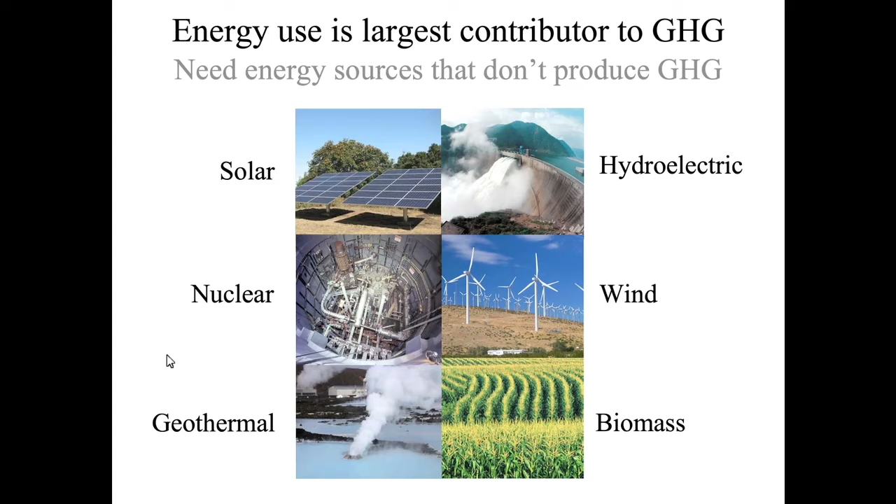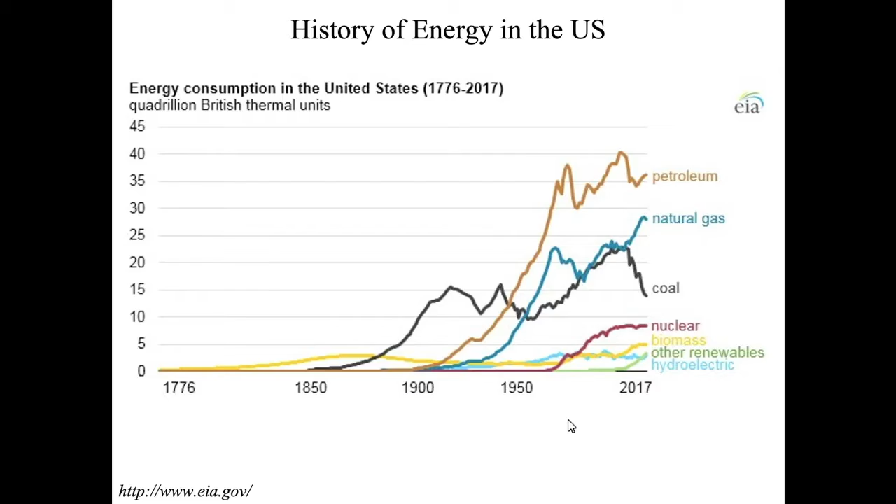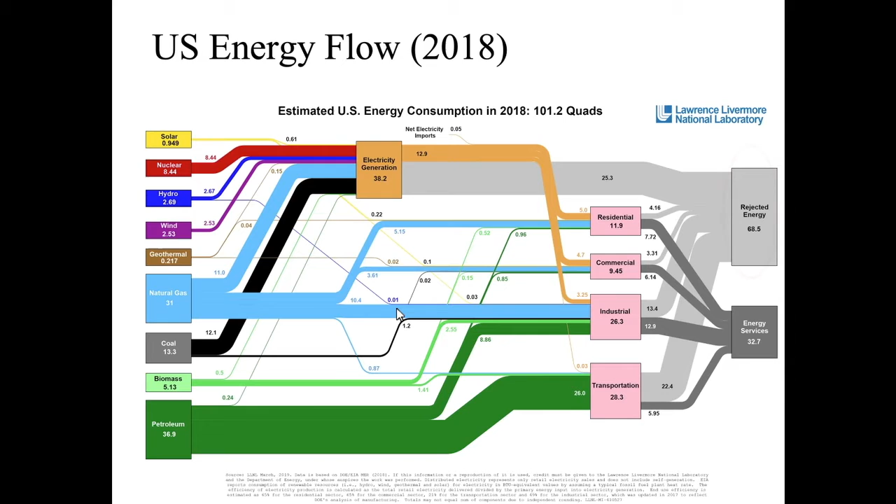The renewable energy sources, the non-greenhouse gas producing energy sources, are small contributors, but mostly they go into producing electricity. So that's how to read this Sankey diagram. And I want to bring your attention to the gray boxes at the very end. This totals up what happens to that energy in 2 categories.

One is rejected energy. What is rejected energy? It is wasted energy, energy that goes into the environment as heat without doing anything productive or producing any work. The actual energy used is described here in energy services, and that's less than a third of the total energy that we consume. So we consume all of this energy and use only a third of it.

That's like filling your gas tank up with 15 gallons of gas and pouring 10 of it onto the road. It's a huge waste and a huge opportunity to improve our energy situation through efficiencies.

This wasted energy is largely a result of the inefficiencies of burning fossil fuels. It's a very inherently inefficient process. A lot of the energy just produces low quality heat that can't be used for useful work. And so we can realize real benefits from improving efficiency.

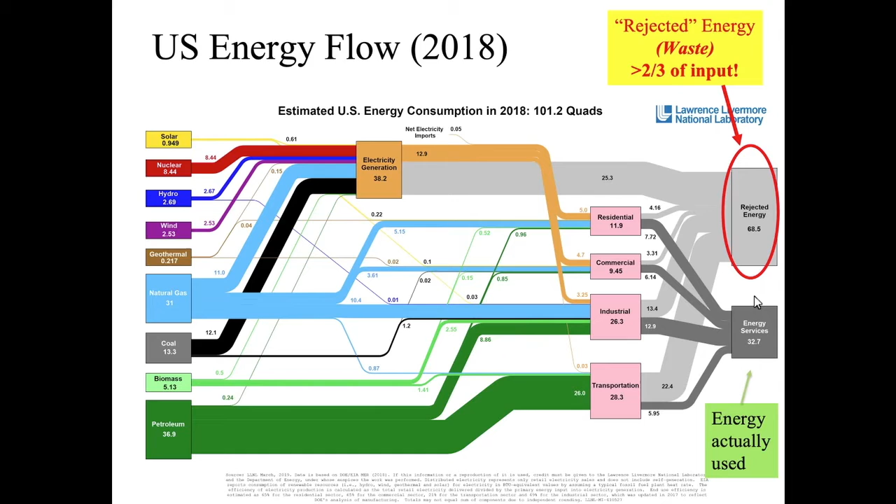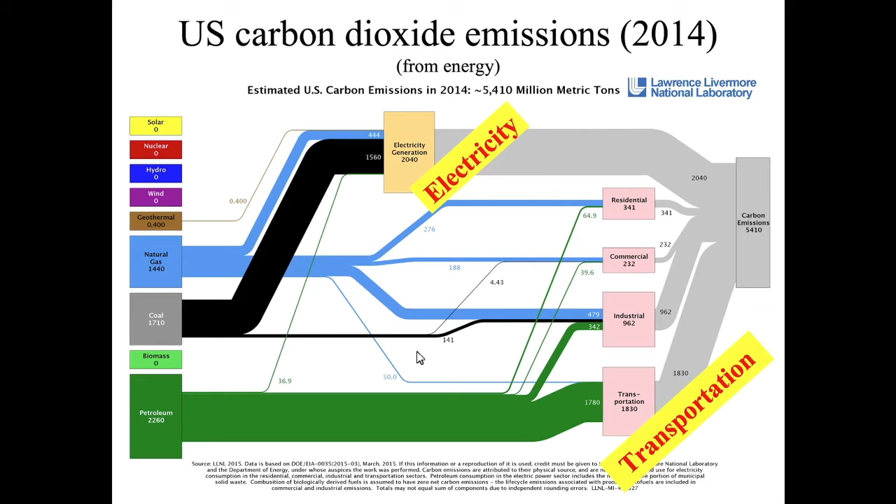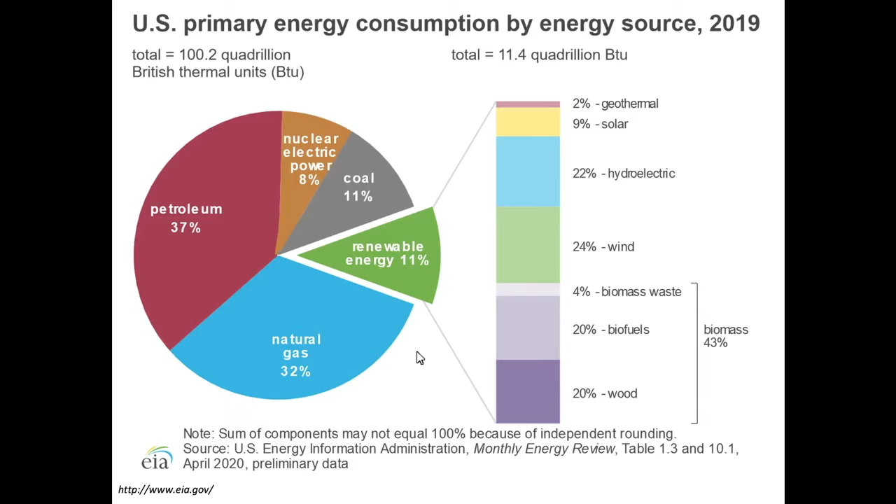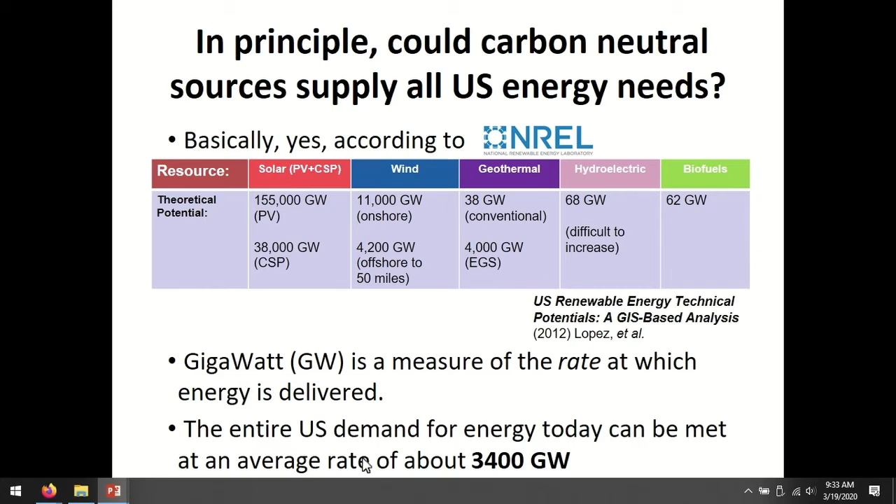Okay, so now let's take a little closer look at some of those potential sources, and explain why I think some of those are more important than others. And we'll start from the right of that previous table. Let me even go back here and see if this works. So we'll start with biofuels, sometimes called biomass. We'll look at hydroelectric and various kinds of geothermal as we work our way toward these other familiar sources that have a lot of potential.

We think we should continue using biofuels and biomass where that's practical and economical, and it's good, especially appropriate for heating in many contexts, modest amounts of heating. We use also biomass right now to supplement our gasoline fuels with liquid ethanol that's derived mostly from corn crops. That I don't think we want to expand a lot because, for one thing, we need corn for other reasons, and for another, the energy that you put into planting, fertilizing, tending crops, harvesting, processing the ethanol, that takes a lot of energy as well. So it's not really much of a net source of energy. So not a great benefit for the balance of impacting the climate. So we're not going to project much, if any, maybe even a decrease in the use of biomass overall.

For hydroelectric, it's somewhat similar story. Hydroelectric power is a great source of clean energy. It can be harvested pretty continuously at a given rate for a given stream, of course, but you can get that energy and deliver it without any greenhouse gases being emitted. So that's what's really good about it. But we have developed, in this country, hydroelectric power almost to the maximum we probably want to. I don't think we want to build a lot more dams and reservoirs to increase this source. We're already on the optimal sites. There's a lot of good reasons to keep rivers in their current state if they're not dammed up.

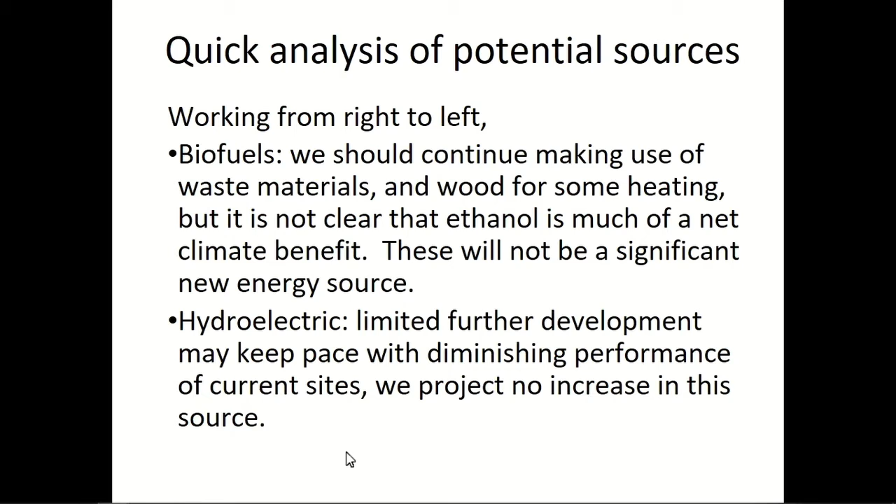You may have heard about the Kalamazoo River where dams are being removed. Wildlife, recreation, habitat. Habitat is changed a lot when you make a big reservoir. There are other competing land uses. There aren't that many good places where you could add more dams, maybe a few more in Alaska. But for these reasons and others, we don't think this source will be expanded a lot.

The story with geothermal can be kind of confusing. Traditional geothermal power is harvested from the earth because deep down the earth is hotter, and anytime you have a temperature difference, you can exploit that to use that energy to make it turn it into mechanical energy, and for instance turn an electric generator and make electric power. And this has been demonstrated. It's done in certain sites. The places where it's economical and good to do are kind of unusual sites where the way the Earth's crust and fissures and faults are, hot parts of the Earth, hotter temperatures are located closer to the surface.

If you've been out to Yellowstone National Park, that's one of these places, and weird things happen. And so these are the places where you can exploit this resource very well. But there aren't that many of them around, it turns out, that are really, really good. To expand this type of energy, you'd have to drill deeper and use more technology and more complicated things, and it would be more expensive, and it's not clear that's a really good way to go.

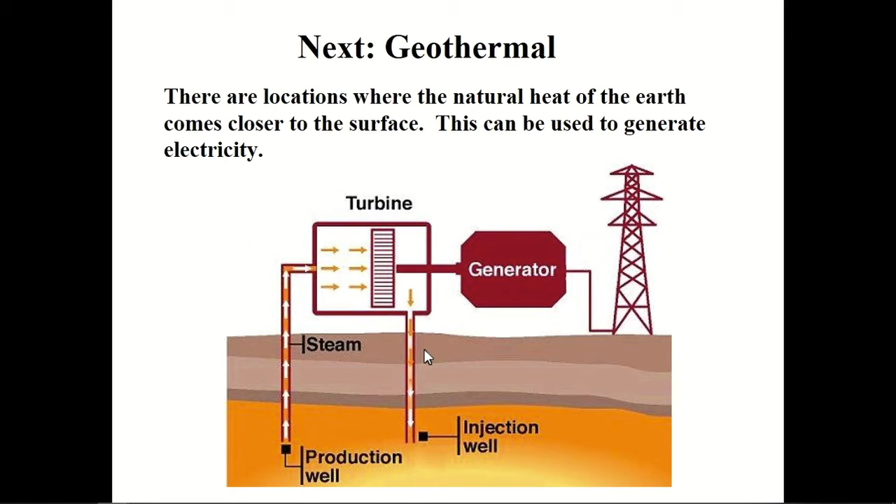So you get less energy than you thought for your investment in drilling the well and putting up the equipment. If you wanted to go someplace else, you'd have to spend more money. So there's not, in our judgment, a lot of potential for expansion there that makes sense.

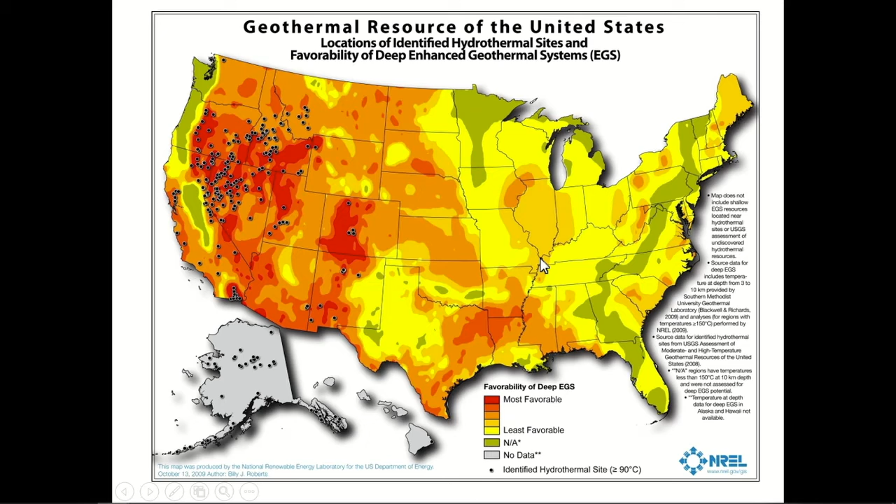This slide shows a few of the favorable sites and where they're located. But there's a lot of places where it's not favorable, and the good sites are actually fairly rare. So this slide again talks about that—I got a little bit ahead of myself on the audio part. Without going into much more detail, most people agree this is not a big future resource to expand and cover a lot more of our needs.

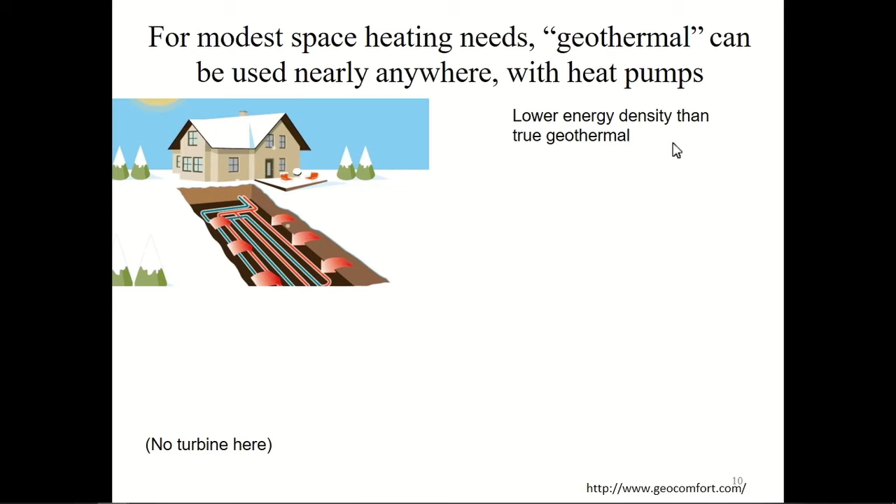There's another kind of geothermal power some people are more familiar with, that is not as expensive, not as elaborate, and doesn't require this deep drill. It just exploits the fact that below ground, anywhere you are, you don't have to go too far down before the temperature stabilizes and is year-round at about 60-some degrees Fahrenheit.

And it means in the winter, you can bury some pipes, circulate some fluid like antifreeze, and extract that heat energy. It's much lower density heat energy, but it can still be extracted using a heat pump, just like what's used in a refrigerator. You can warm up some air or water for use in your home or reasonably sized buildings, and that works pretty well.

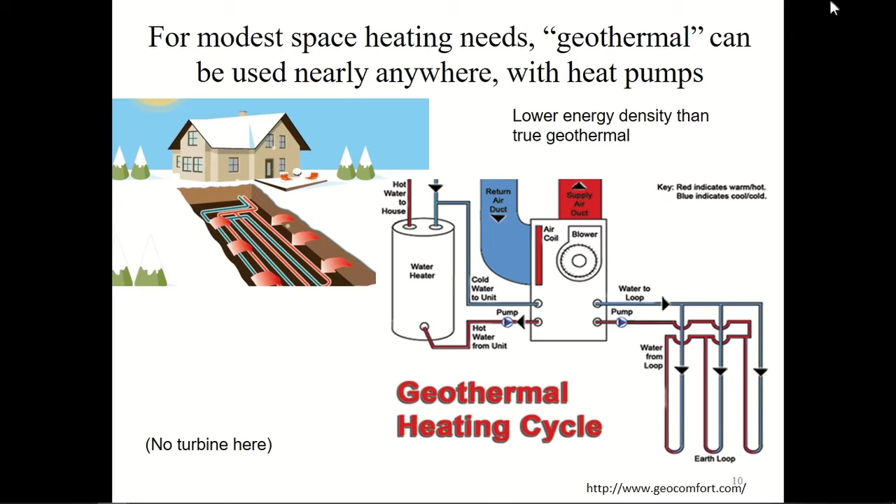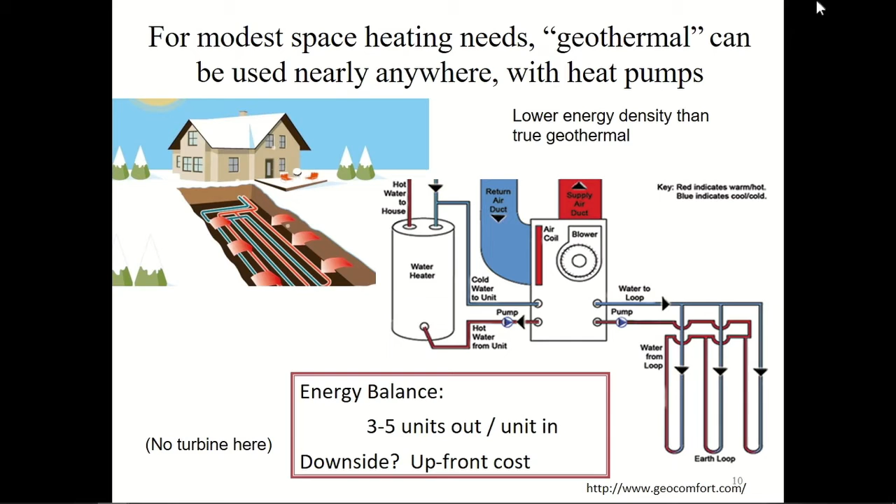And it's another fairly carbon-neutral way of supplying some energy for heat. There's nothing wrong with it. But again, it's probably not going to be a huge source of energy on a large utility scale, like for industry and transportation and all the other things we use energy for. But it can make a contribution for home heating and space heating at a modest scale.

In fact, we are doing it here at Western Michigan University with our new Alumni Center and the Zhang Legacy Center, where the archives are on our East Campus. It can be a reasonably good way to go if done well. It's fairly expensive relative to other forms of space heating today, so that's another reason we don't think it's going to be easy to expand a lot, but it will have a place.

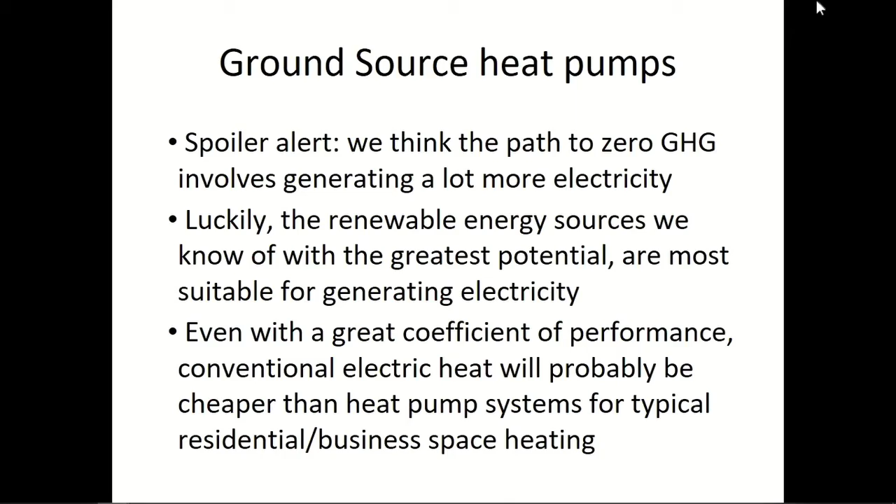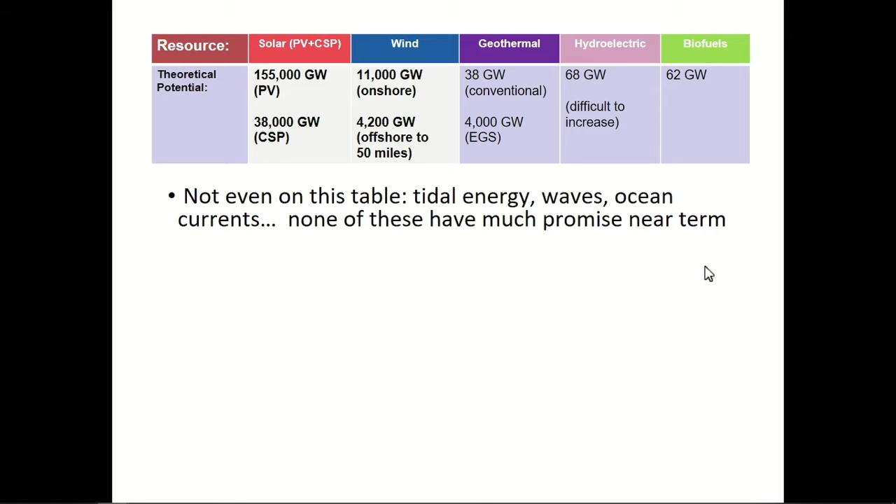So on the large scale, when you're talking about the thousands of gigawatts or the 100 quadrillion BTUs of energy we use per year, we need to be talking about the things further on the left on our previous table—the solar power and wind power, which can be exploited at a larger scale, again with little climate impact. So those are the things I'm going to count on and recommend that are in the mix in 2050, including nuclear fission.

Yeah, that's the kind of nuclear power we have nowadays already. Nuclear generating plants are already generating electricity, supplying the grid all over the country. About 100 nuclear power plants in this country right now, many in other countries as well.

While some people have issues with nuclear power, the threat of climate change on a global scale means we really have to take seriously the possibility of continuing to use nuclear power, even using more nuclear power in the future, unless we really want to change our way of life or decrease the amount of energy we use significantly.

So that's because, despite issues with radioactive waste at the end of a fuel cycle, the greenhouse gas emissions traced to nuclear power are very small compared to fossil fuels, which are the other big way we generate electricity today. So we're going to keep that in the mix as we go ahead.

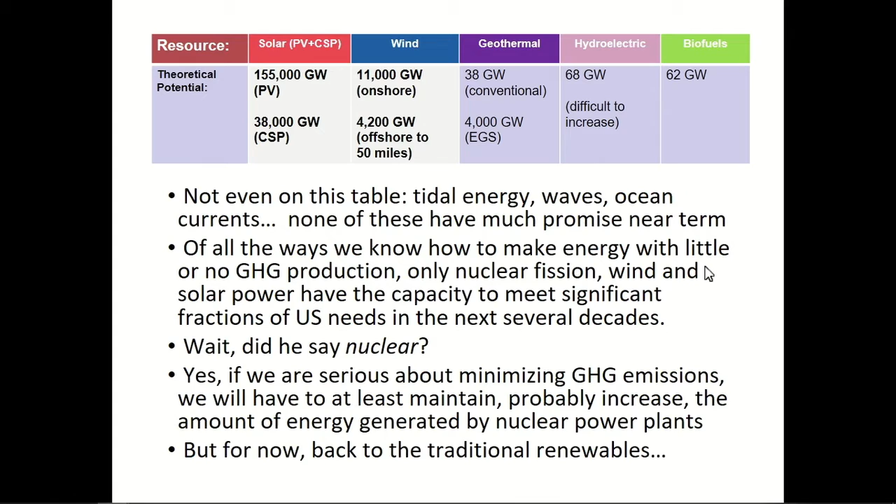And we might be able to talk in another session about newer and safer technologies for exploiting that resource. But for now, let's go back to our traditional, more familiar renewable energy sources that can help us on a large scale. And those are solar power in the form of photovoltaics.

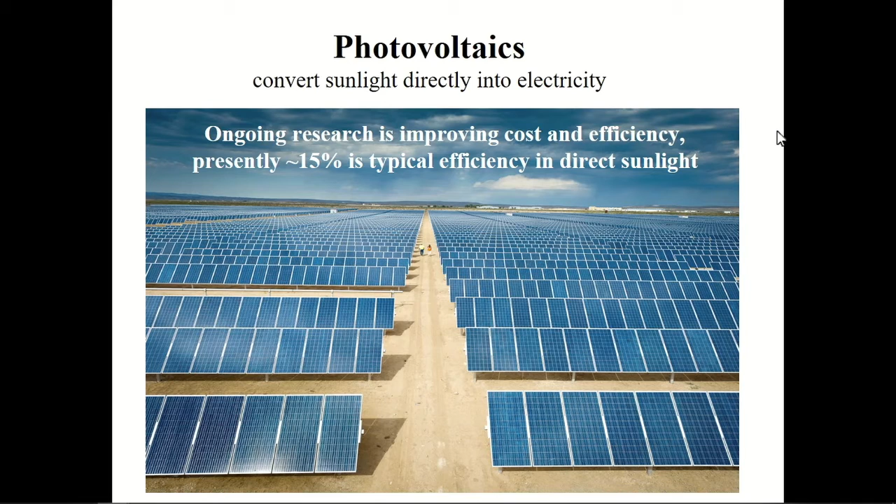Those are the panels, the dark-colored panels that just by sitting in the sunlight turn solar energy directly into electrical energy. That's one way to make solar power. It's a very nice way, very flexible. These are solid state panels. They continue to be improved and get cheaper to manufacture every year, so they're already very economical in a lot of situations.

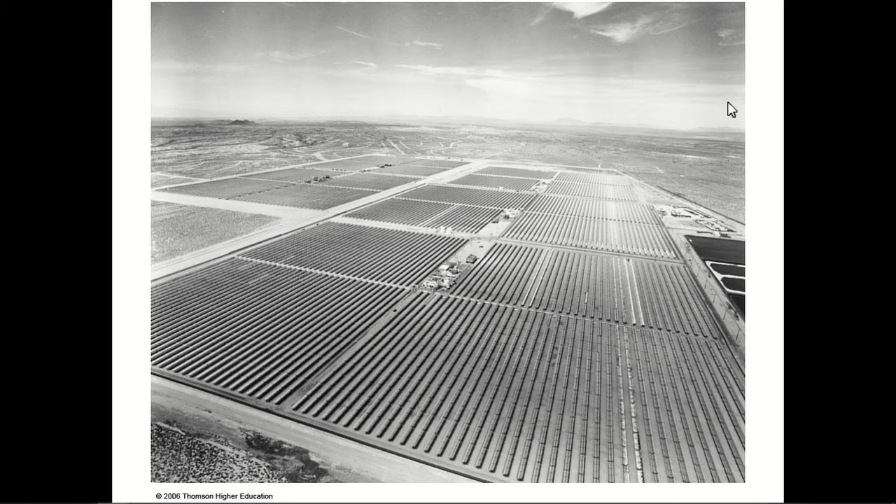These kinds of plants are always at the utility scale—they have to be, since they wouldn't be very practical on a small scale. You have big fields like this that, instead of being solar panels, are these concentrating troughs. Here's an example operating right now in California at I think 165 megawatts of capacity on a clear day.

Besides generating electricity with solar power, you could also use the heat directly. That's usually better on a smaller scale, where the heat is needed for domestic hot water or some space heating. Domestic hot water turns out to be a very practical use for solar thermal, because there's no inefficiency associated with converting the energy into different kinds. The sun's light can heat the water you're going to use directly, and you've done it—that's all you need to do.

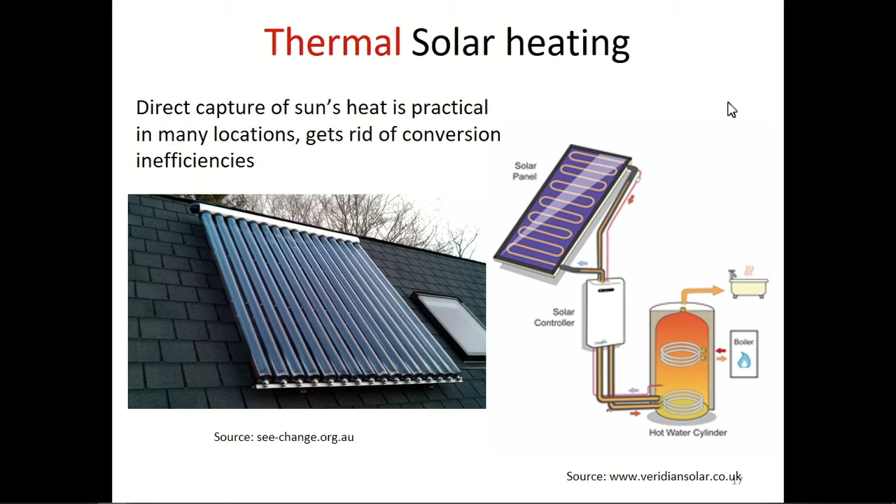We certainly envision some of that continuing, but it's going to be on a fairly smaller scale. Not every home will be able to use it, not every building will be able to use it. And in the grand scheme of things, the amount of energy used for domestic hot water heating is not a huge part of the total, but it's there.

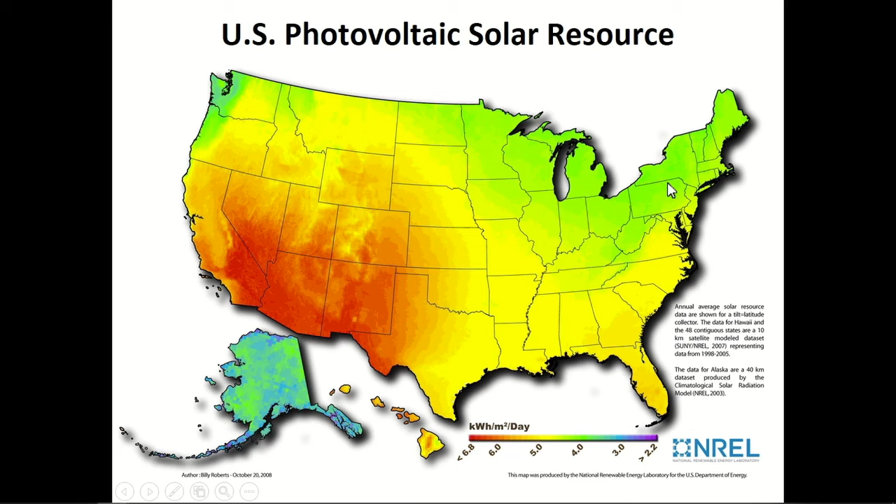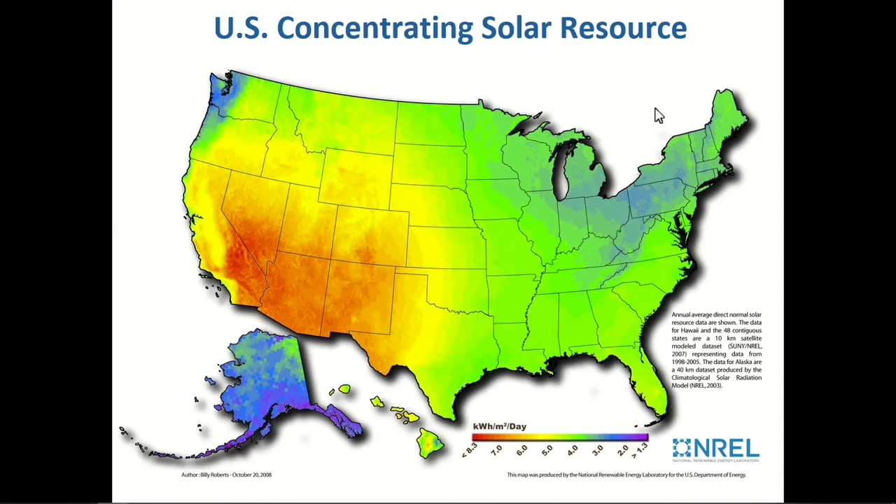Here are just maps of where the solar resource is located. It's not surprising—it's in the southwest where the weather is favorable and skies are clear, not so much here where it's always cloudy, or much of the northeast. It's a slightly different picture if you need direct sunlight for a concentrating solar plant, but it's basically the same, so we don't need to spend any time on that. Let's go to the next one.

Offshore wind power can also be a big benefit. You don't have to worry about how the land would have been used if you have an offshore tower. You also get the benefit of very steady winds—usually better, more reliable and stronger winds offshore, where there are no obstructions to the wind depending on the direction. You don't want to go too far offshore because you have to bring that power back to land where the grid is, where the electric need is. But usually the extra cost of building in the water and transporting that energy, if you're within a few tens of miles of the shore, is compensated for by the extra wind available.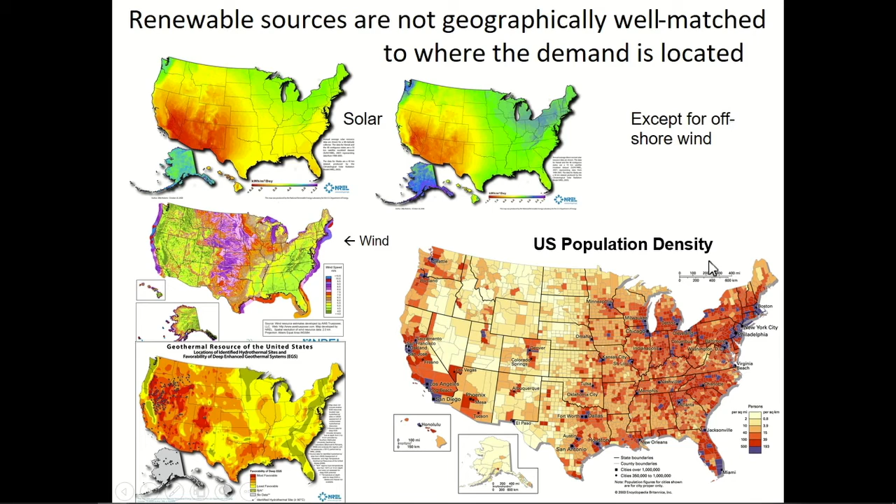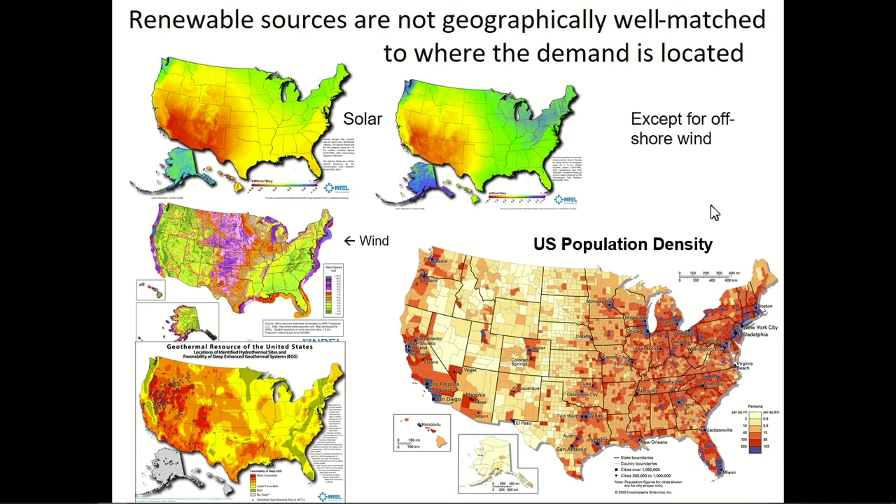It doesn't match very well with where the solar energy is concentrated, or even where the wind energy is concentrated. The exception is the offshore wind resource on the West Coast. That isn't very far from a lot of people living in California and in the Northeast, where we have this offshore wind potential here. That's pretty close to a lot of population here. But the population here, down here, and even in Florida, will have to get their power. If their power comes from these renewable resources, it's going to have to be transmitted over fairly large distances. That can be an issue, which we'll talk about maybe in another presentation, in more detail.

There are other kinds of mismatches that we need to take into account that are going to contribute to the difficulty in implementing this scheme. So the geographic one I talked about, and that's because, at least if we're talking about electric power, you lose a percent maybe every 100 miles. If you have very high voltage transmission lines, sometimes it's more if you have older power lines. We're going to have to probably upgrade the grid to reduce those losses, because right now going halfway across the country is not very practical, and it's a bit wasteful.

There are also time-based mismatches. The demand for energy changes during the day. It's less at night and more during the day. That one's pretty predictable. There are changes in demand with the seasons because of air conditioning and heating needs in the winter and summer that aren't so great in the fall and spring.

But if we're talking about renewable energy, there's also daily changes. Obviously, the sun isn't shining at night, it's only giving us solar power during the day. And the winds change with the seasons. So all these things are going to have to be taken into account. Some are fairly predictable, others are less so.

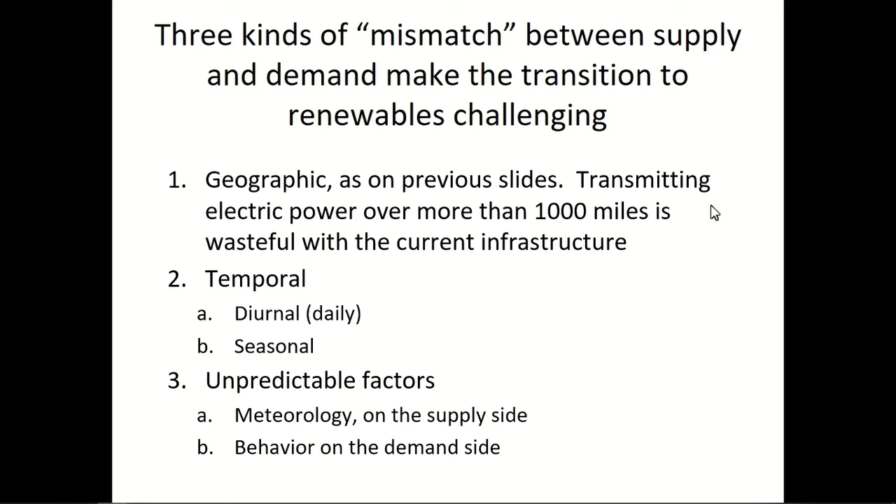There are also some unpredictable aspects on the demand side: people's behavior, industry schedules. Some of it's known, but the utility companies are not used to having to know that in very much detail, because they just make sure they have enough energy available for whatever the demand would be.

So what we're envisioning is really a new way of doing things. What is it going to look like if we could really go to a minimal greenhouse gas energy future? The thing we have to do for this is stop burning fossil fuels. That's what creates most of the greenhouse gases that we're worried about.

Now, as we've seen, the best, most practical technologies for getting energy without greenhouse gas emissions are also good at generating electricity. And electricity is a very versatile form of energy. You can use it for lighting, it's easy to use for heating, for cooling with air conditioning, that's electrical. You can do mechanical work of all kinds with motors.

Our vision is that we use the next 30 years to convert any big energy users that don't already use electricity, to be able to use electricity. So obviously we're going to need more electricity available for them to use. We're going to have to build more wind turbines and solar power facilities as fast as we reasonably can. And as these come online to supply the grid electricity, then we have to retire the coal and gas-fired power plants that currently supply electric power to the grid.

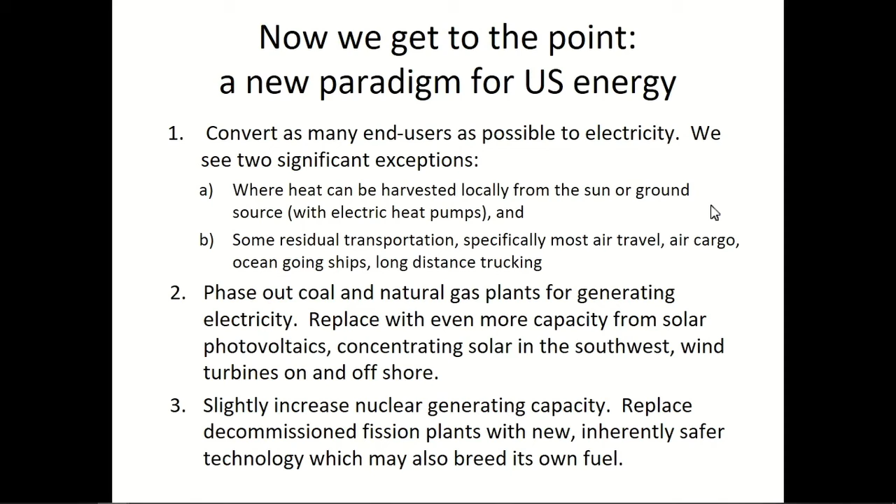All right, so one of the difficult parts of this is the transportation sector. You might not remember from the flow chart way at the beginning, but transportation is a big part of all the energy we use. It's about 28% of the total energy input for the United States at this point in time.

We've seen that our renewable sources are good at making electricity, but at first glance, the way you usually supply electricity to a user is with wires. So how do you do that with vehicles that have to move? That's a bit of an issue. The obvious answer is that we're going to use storage batteries, but how much can we really do? Let's take a look at this in a little bit more detail.

Here's how the energy used in our transportation sector is broken down into various pieces, various parts of the transportation picture. The major fraction of the energy used in transportation is for moving people around in their own individual vehicles. I'm not going to distinguish between cars and light trucks. A lot of the pickup trucks out there are just used for basic transportation also. So those road-going vehicles already make up almost 2/3 of all the energy we use for all those trips we take. We like road trips and things like that.

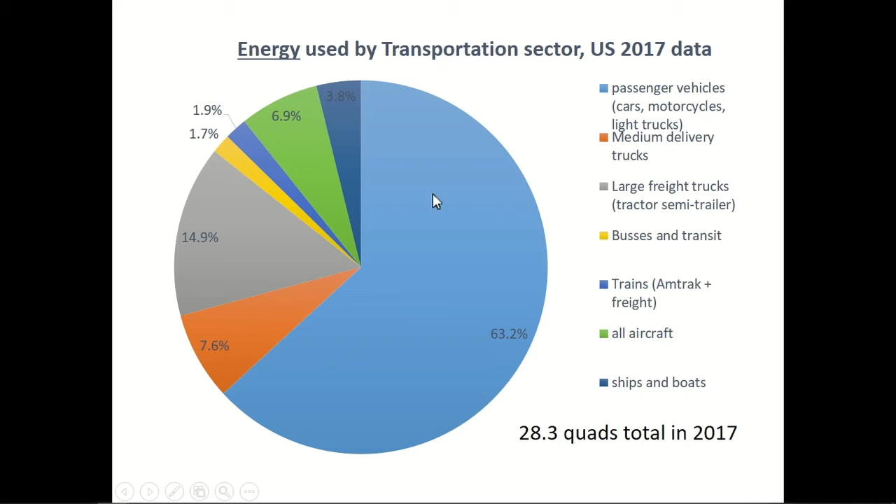On the technical and practical side, it looks to me like that 63% of energy in this big blue section, on a 30-year time scale, it's not hard to imagine virtually all of this being converted over to electric power through storage batteries, either based on current lithium batteries or a future battery technology that's even better. Battery technology is continuing to improve in energy density, longevity, and cost to manufacture, so these trends are going to keep going.

That shift can be self-sustaining because if you ever try an electric car, you see a lot of advantages. These include the total cost of ownership, because electricity is cheaper than gasoline. Maintenance is very low, reliability is very high, and the driving experience is very pleasant, with no vibration and very little noise. All these advantages will overcome the disadvantages in upfront cost, which is decreasing, and the range and charging speed issues, which will be dealt with.

When you get further around on that pie, you get more challenging situations where you need longer range and more energy, like long-distance trucks, ocean-going cargo vessels, and aircraft in particular. Big aircraft are not going to be able to carry very heavy batteries, and they need a lot of energy. So the bottom line is that we don't think we'll be able to get rid of all fossil fuels in the transportation sector by 2050. That's just a bit too soon, a little too much to ask.

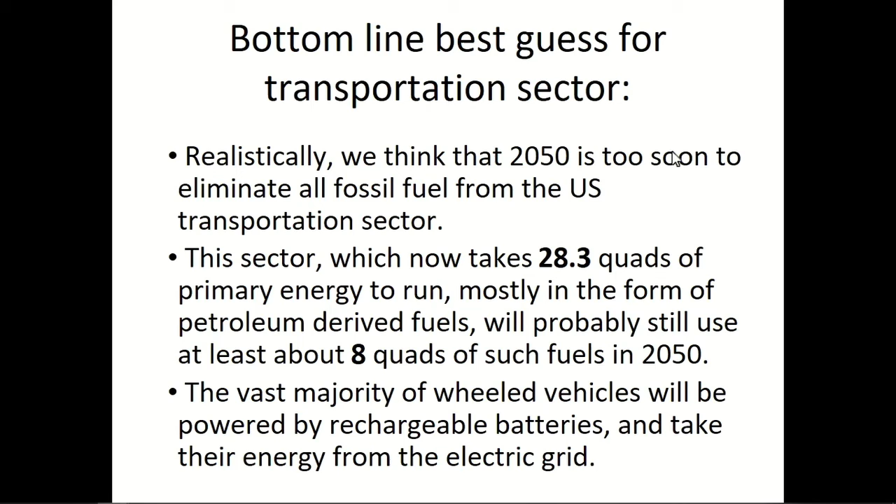So our scenario retains at least about 8 quads of energy coming from fossil fuels devoted to the transportation sector, where it's still going to be needed. But the rest will go to rechargeable batteries, taking their energy from the electric grid. That's our projection. On the rest of the picture, except for that and some heat energy taken by ground-sourced heat pumps and solar thermal collectors, everything else we're going to try to do with electricity.

And then we're going to supply the electric grid with renewable sources, which means the grid itself will have to be bigger, with more capacity, and able to transmit energy over longer distances. That'll help us utilize solar and wind energy where it's most practical to harvest and get it to where it's needed. Long-distance transmission will also help with intermittency — if the sun isn't shining here right now, it is shining someplace else, and if it's cloudy here, it's sunny elsewhere. We can move that power around, and we'll be in good shape.

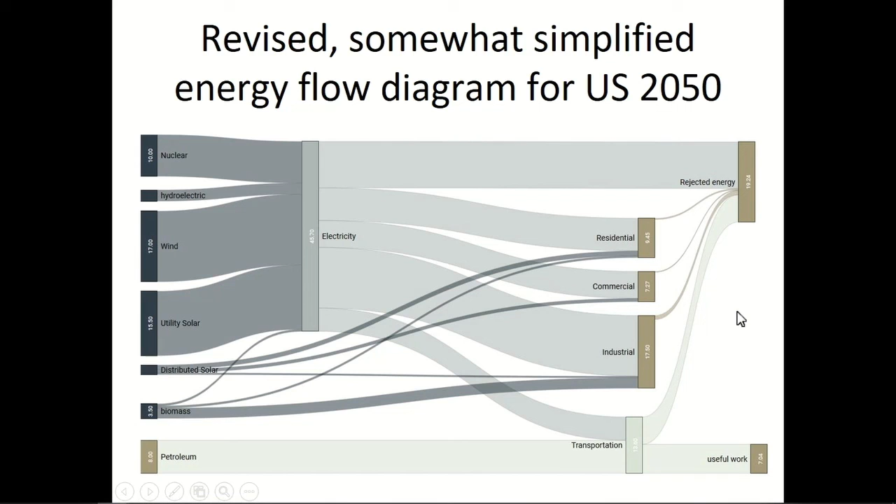So that's our scheme, our sort of vision, bottom line. I think it's doable. It's not going to be completely easy, but there is a way in principle to supply all of our energy and more with much less greenhouse gas. This 8 quads of petroleum that's still here is less than 10%. That should mean our greenhouse emissions have been reduced by 90% at this point, if we get close to this scenario, and then we can still work to make improvements. That would be significant compared to where we are today.

Okay, so it's not going to be easy. Hopefully next we'll have another session available to you soon that will discuss the obstacles. What could those obstacles be? Well, we're going to have to make a lot of wind turbines and photovoltaic panels.

Is that possible and practical with our manufacturing capability at this time? We're going to make a big expansion of the electric grid, do it in a smart way, with an eye toward efficient transmission over longer distances. Technically, I think that can be done, but it's going to be a challenge, probably.

What about energy storage? We're going to need probably some energy storage. If we don't want to overbuild, we're going to be working really hard to build as many wind turbines and PV panels as we can. We don't want to have to build more than we need. So that means we're going to have to be able to store energy for when the sun's not shining and the wind's not blowing, to use later. That's going to be a big change—lots of capability we don't have yet. How to do that is a potential challenge.